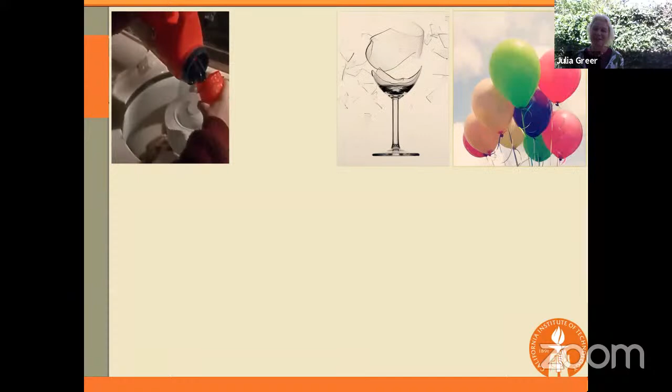All right, so you've been staring at this title for some time now, Materials by Design, so that probably makes a lot of sense. But when you look at the second part of the title, three-dimensional nano-architected metamaterials, you might be wondering why do all these words belong in the same sentence. The reason for that is because I'm sure many of you are familiar with a situation like this: you go to the store and you buy all these things that you absolutely need, and the bags that you are using to hold all these materials just are not strong enough. So of course this is not the only problem, right.

From the wine glass that shatters all too early for the toast, to the balloons that pop too easily, to the 'I really meant to have four children' situation—of course these are all examples of materials that are lightweight, and because they're lightweight they're weak and easy to damage and tear. Now in contrast, the materials that we know to be strong, that we know to trust—for example, if I weren't giving this seminar virtually I would have probably taken one of these to come see you. The weight of a Boeing 747 is roughly 1 million pounds.

So if you do a very quick calculation, if I were to fly to Istanbul to see all of you at 5 gallons per mile at $2 a gallon, my ticket would have cost about $73,000, right? So I'm glad that you would have probably reimbursed me. Thank you for that.

Of course, this is an example of a material that is strong and also expensive. The Dreamliner already reduced its weight by about half, and so uses 20% less fuel.

Now, speaking of materials that are too heavy, whatever happened to the space elevator? Do you remember how maybe a decade or so ago, we kept on bringing up this concept of a space elevator? Well, as far as I know, there still isn't one.

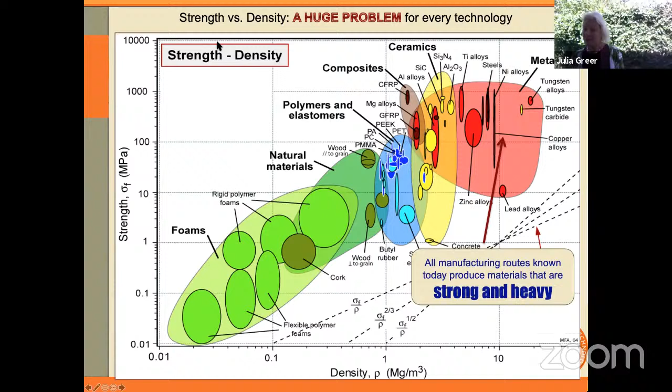And the reason for that is because of this very busy plot. If we plot strength as a function of density in this kind of log-log parameter space, what we see is these colorful domains, representing all the materials that we know how to make today. Here I chose to plot strength, but it could be any other mechanical attribute, like toughness or stiffness. The picture that emerges right away is that we are very good as a society at making materials that are simultaneously strong and heavy, or light and weak.

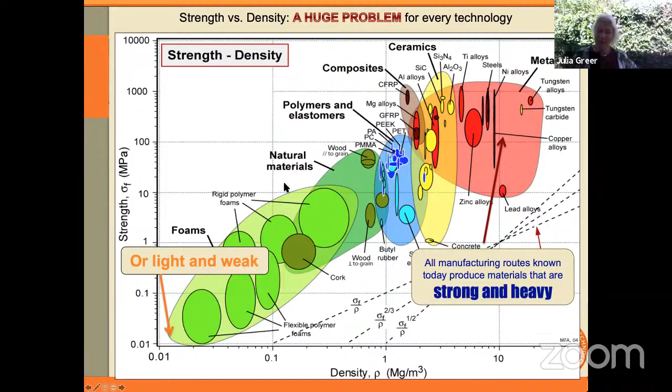What we're not so good at is making materials that are simultaneously lightweight and very mechanically resilient. All of these colorful domains represent the material classes that we know how to make today. So how do we get to the so-called white space, or target region, if everything we know how to make today is already plotted here?

The way we do it in our group is by introducing a concept of architecture in material design. For example, if you look at the Great Pyramid of Giza, this is the largest man-made stone monument. Of course, it's very strong. It stands 150 meters tall and weighs nearly 6 million tons, so it's very heavy.

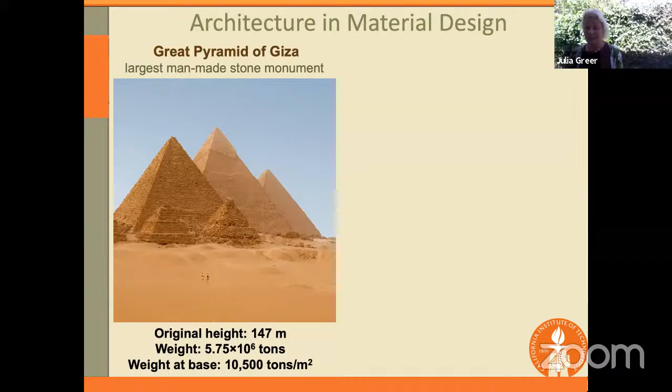Now, in contrast, the Eiffel Tower stands twice as tall, over 300 meters, but weighs three orders of magnitude less. So what that tells us is that with proper architecting of your materials, you're able to attain the same mechanical resilience without using quite so much material.

So we began this research with making micro lattices. What you're looking at is an entirely nickel-made micro lattice sitting on top of a dandelion, and you can see it's hardly perturbing it at all. Since when can we put a chunk of metal on a dandelion? These materials are very, very lightweight.

But to get to the simultaneous attainment of lightweight and strength, we need to go down 3 more orders of magnitude in dimensions. All of the examples you're seeing on my screen right now are called nano lattices or nano-architected materials, all of which were made in our group.

There's an obvious level of porosity here, as you can see, they're very open. They're called cellular solids, and because of that, they contain about 99.9% air, since these are very open architectures. Now, the less obvious level of porosity, of course, is this.

Many of these architectures are comprised of an interwoven network of hollow tubes, and the tubes are hollow on the inside. So the largest dimension of the solid at any location is just the wall thickness of each of these tubes, which can be on the order of 5 or 10 nanometers. You can imagine that this single material embodies every length scale, from 5 nanometers or so, to hundreds of nanometers, to microns, and eventually millimeters and centimeters.

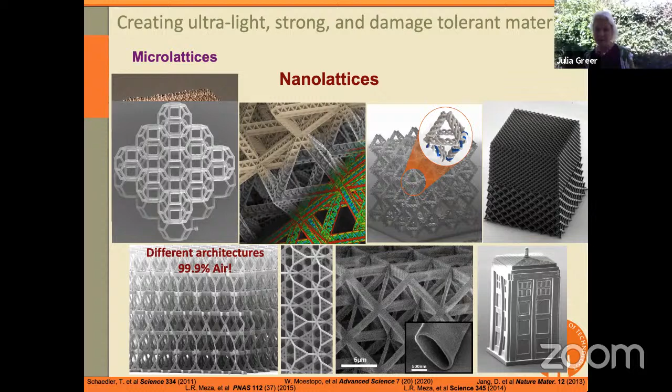And because of that, it is appropriate to call these materials metamaterials, because their properties can no longer be described only from the perspective of material science, or only from the structural perspective.

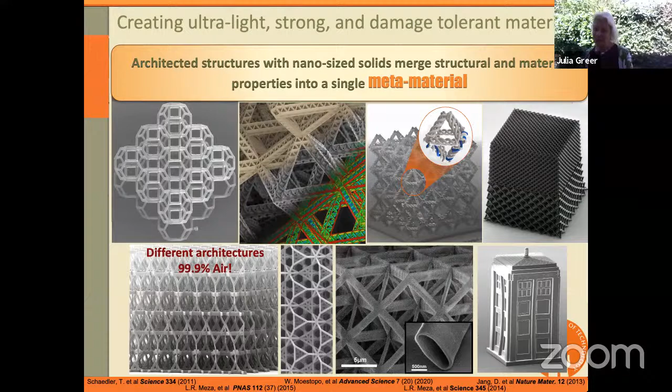At these length scales, at the nanoscale, these properties are no longer independent of one another. Now, I demonstrated to you that these are very lightweight, but I have yet to show you why they're high strength. Here's an example of a so-called size effect.

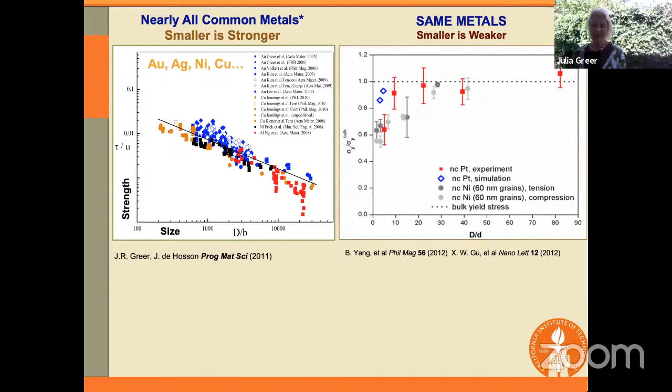Now, if you take exactly the same metals and change their atomic microstructure such that they now contain grains and grain boundaries, all of a sudden this effect is reversed and smaller is now weaker. Same gold, same nickel, same platinum—this is a more modest size effect because it's not plotted in log-log space. But nevertheless, it shows that when you reduce the dimensions of nanocrystalline materials, even though they're chemically the same, their strength becomes lower.

Now, the size effect manifests itself in other properties. For example, glass is known to be very shatterable, but at the nanoscale, if you look at the tension of this single glass nanorod whose dimension is 150 nanometers, watch this region where you can clearly see it forming a neck. Of course, this behavior is much more typical of metals as opposed to glasses. This glass thinks that it's a metal, and you can see it's deformed over 100% before failure, which is very unusual for glass.

Here's the last example of the size effect: we are deforming a single unit cell of one of these nanolattices, made out of a very brittle material, titanium nitride. You can see the beams bending and deflecting, and if you measured the tensile stress, it would exceed 1.7 gigapascals. Something that brittle, tensed at 1.7 GPa, should certainly not stay intact—it should be fracturing. But these beams are able to deflect not only once, but over multiple cycles without any evidence of failure.

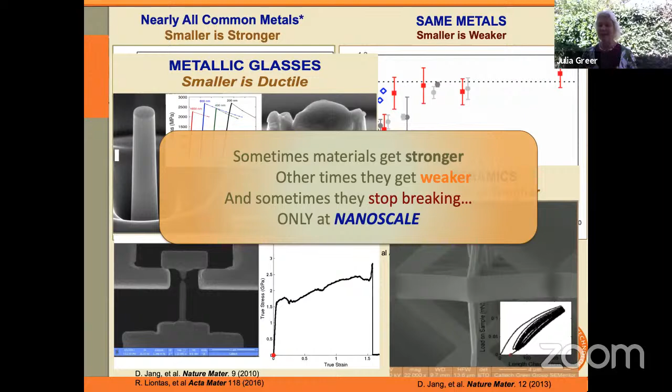So the takeaway message is this: sometimes materials get stronger, other times they get weaker, and it is possible to suppress brittle failure. But all of these effects emerge only at the nanoscale. So the big question in our group was, how can we harness this beneficial size effect and proliferate it onto a larger scale? This is where the concept of architecture comes into play.

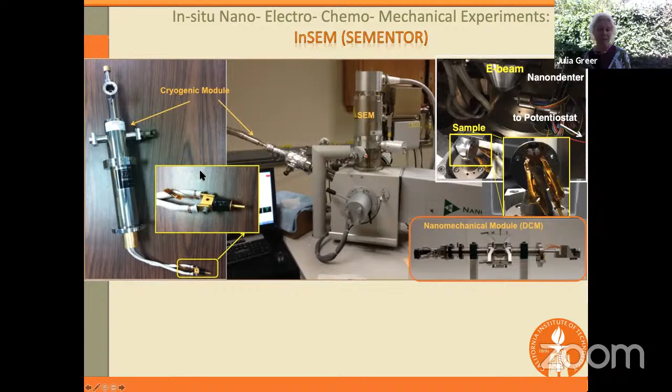To do our experiments, since all these materials are quite small, we have to utilize a special instrument. If you look at this center part, it's an SEM chamber—scanning electron microscope—equipped with a variety of other capabilities. Here's a nanomechanical module for mechanical experiments, an electrochemical module for experiments like batteries and energy storage, and a cryogenic module for experiments at much lower temperatures. These are the different acquisition devices that we use.

Now that I've shown the kinds of samples we work with, I'd like to walk you through the steps of our hypothesis. The question was: can we somehow harness the beneficial effects of the nanoscale and proliferate them onto a larger scale?

So what I'm about to show you is a nano architecture. This specific one is called an octet architecture. It's made out entirely of hollow tubes with alumina, which is a very brittle material. The wall thickness is on the order of 50 nanometers and the tubes are all hollow, so it's effectively your coffee mug with a severe case of osteoporosis. It's very porous and very brittle.

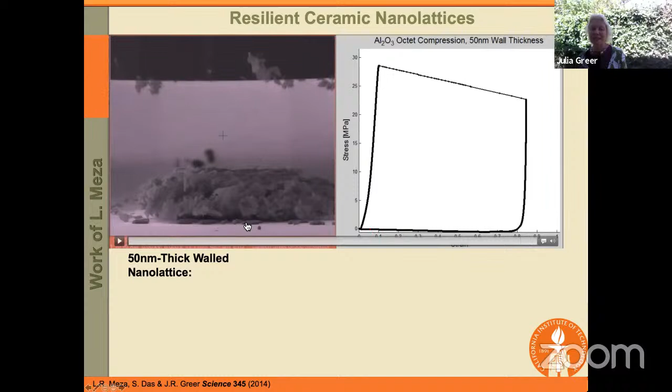Now let's see what happens when we compress it. As we compress it, of course, it's going to shatter and fail brittly. This is not something people are surprised by. You can see this failure right away, it doesn't even try to recover. You can see we have a little nano cemetery in our instrument, and nothing surprising basically happened.

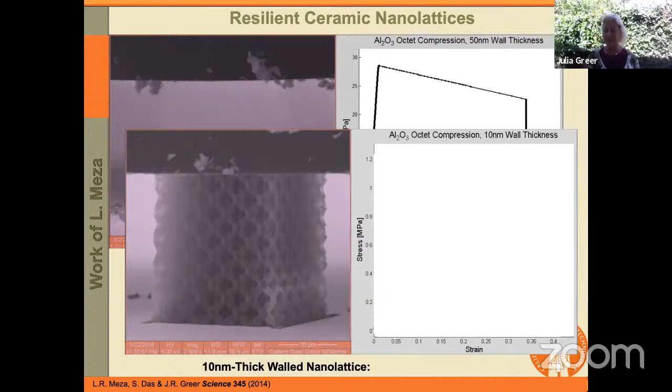Now let's repeat this experiment, but change one parameter: the wall thickness. We'll deposit this material in exactly the same way, using exactly the same architecture, so it's still an octet. The only thing we'll do is reduce the wall thickness by a factor of 5. So instead of 50 nanometers, they're now 10 nanometers, just as brittle, and in fact it should shatter even more easily. Let's see what happens as we compress this very brittle alumina material.

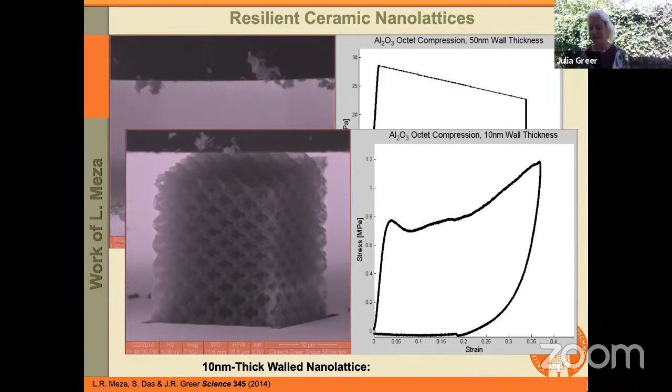You can see it compressing, compressing, compressing, and then just as we're expecting it to fail, you can see what happens. This particular material thinks of itself as a sponge. So you can see very clearly exactly the same experiment, exactly the same architecture, but two very different responses, all as a result of the wall thickness reduction. If that doesn't convince you there is in fact a size effect, then I should just stop this topic right now. Of course, this fully recovers.

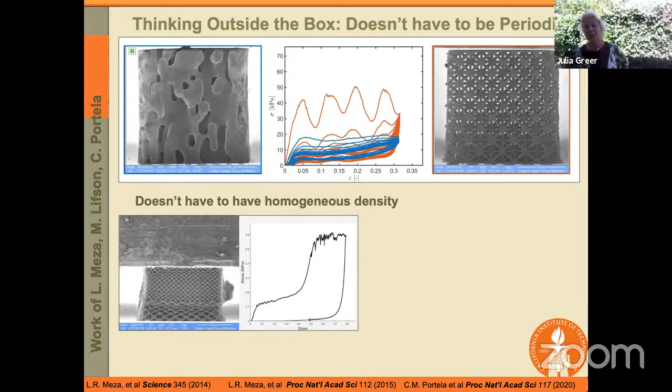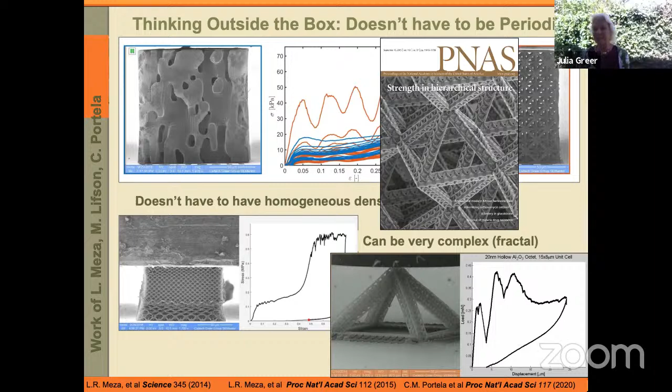Now, these architectures can be complex in the sense that they can be fractal, so that each individual beam is comprised of these cells. You can see already that each of these legs is starting to kink, and just as we're expecting it to fail right at those kink locations, because they're clearly very brittle, you can see the architecture fully recover. So what that's teaching us is that the size effect is very powerful and can indeed be proliferated onto larger scales by this concept of architecture.

Now, one common feature of all the architectures I've shown you up to this point was the presence of so-called nodes, junctions where the beams meet. To avoid the nodes, what we've designed is a woven architecture. What you can see here is effectively a rope, comprised of various strands like a braid or a spiral. At the nodes, we no longer have any of these junctions. Look at what's happening: we're able to push on a rope effectively. We can tense it first and then compress it, and you can see it offers resistance in both directions.

So it's effectively a rope that is both compressible and extendable simultaneously, and that hasn't really been demonstrated before. What you can see here is how much more strain these types of woven architectures are able to attain.

Now the question is, why does it happen that these hollow architectures, made entirely of brittle material, are able to recover? Well, the answer actually lies in mechanics. If you look at failure mechanisms in beams, these hollow beams experience a local instability called shell buckling, which is effectively what your soda can would do if you were to step on it.

It turns out there's a critical ratio of wall thickness over the diameter of the beam. If you make a simple model of this beam, the wall thickness is T and the radius is A, you can set the failure criterion: local buckling would occur at a critical figure of merit of this T over A ratio, while yielding would certainly be failure since it's a brittle material. Setting them equal to one another, for this particular material, alumina, we can come up with the critical fraction: T over A critical for this material is about 0.03.

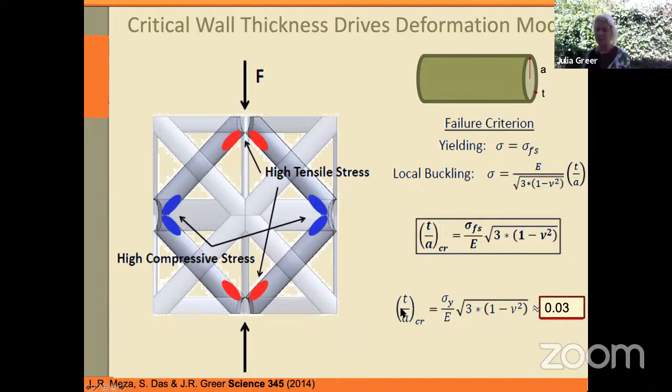Let's see what happens here. For the 10 nanometer wall thickness, this critical ratio of T over A is below 0.03, and for each unit cell size, for each type of sample, it fully recovers. You can see that from the data, going all the way back to zero strain. This image after deformation - you would never be able to tell it's taken after deformation because it looks exactly the same.

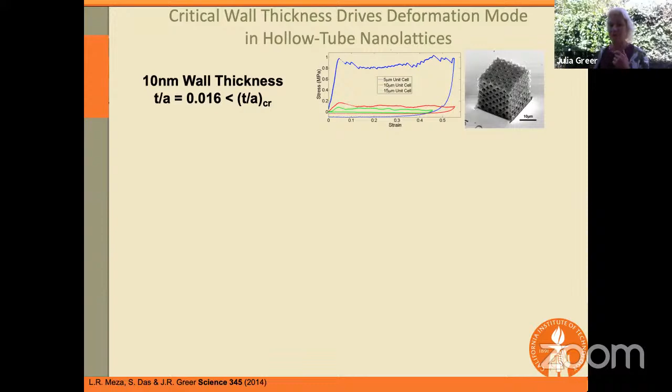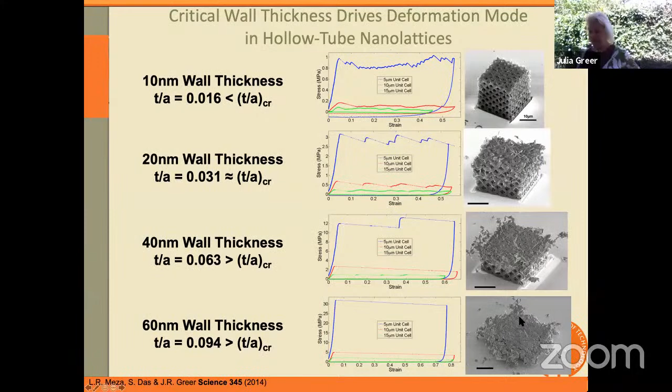As we increase the wall thickness and get first to the critical thickness and then exceed it, the deformation becomes a lot more jerky, more catastrophic, and the material is not able to recover after that. So what that tells us is that the answer must lie in mechanics.

Let's see how close we got to this theoretical maximum and whether we got into this white space. The plot I showed earlier of strength versus density - these oblong regions are the data we had taken through the years. What you can see is that we already, for example by creating hierarchical nanolattices, reduced the relative density of these architectures by two orders of magnitude.

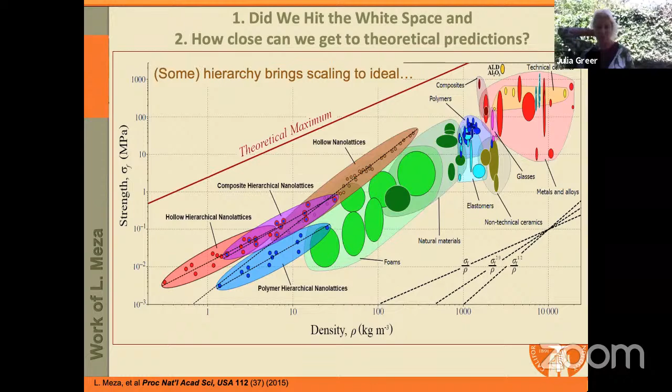And we certainly have ventured into the white space. This was at the time when we started doing this work, and we - and perhaps many other groups - can now do a lot better in getting closer to the theoretical maximum.

So now the question is this: if it's all about the critical wall thickness to diameter ratio, just like we showed for the recoverability, that means if we were to build a building where each beam had a thickness of 10 centimeters and a radius of 3 meters, and then we constructed a giant building like this...

Maybe you guys have something like that in Turkey - and a big giant came and stepped on it, it should just spring right back, just like our architectures do, right? Hopefully you're all smiling, because of course that would never happen - a building would never recover like this.

So why not? The mechanics tells us that as long as T over A is below this critical ratio of 0.03, we should be able to observe this recoverability, but we don't observe it at large scale, of course. So how does the size effect manifest itself here?

It turns out that the answer is all in defects. Of course, brittle materials all fail at flaws. Before any of the beam members in a building has a chance to recover, the material will locally fail at one of these flaws, because the probability of finding a flaw, or multiple flaws of certain sizes, in something that's 10 centimeters thick is 100%.

So when we globally apply some kind of compression, the local stresses ahead of these flaws will always exceed the globally applied stress, and certainly the material will shatter and break before any kind of structural instability takes place, like shell buckling.

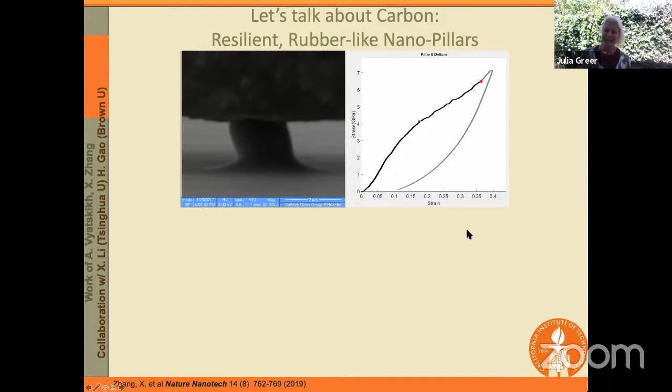Now, you all know what happens if you push really hard on your pencil lead. Of course, it's not compressible, and it starts shattering. Look what's happening with this pillar: it's now at a stress of 5 gigapascals, a very, very high stress. You can see that as we're compressing it, it's really not enjoying itself. It's bending out of plane, and then it fully recovers. So this very brittle, very strong carbon material thinks of itself as rubber. How can that be?

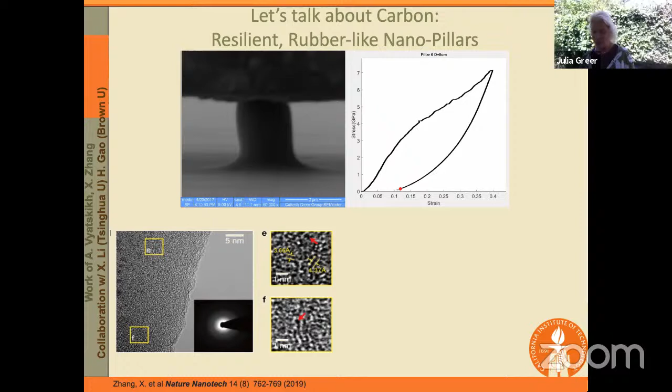That is very, very unusual, right? What we discovered is when you look very carefully at the microstructure of this glassy carbon, you see these curved strands. Even though the structure is amorphous or glassy, there are small regions of graphene-like ribbons, separated by a very small distance of about 3 angstroms. These segments of graphene, effectively sp2 hybridized carbon, are what allow these regions to shear with respect to one another without undergoing global failure. We collaborated with a group at Tsinghua University who performed molecular dynamic simulations, and what you can see here is the representation of the microstructure we uncovered experimentally, done through atomistic simulations. These are the curved regions of sp2 hybridized carbon.

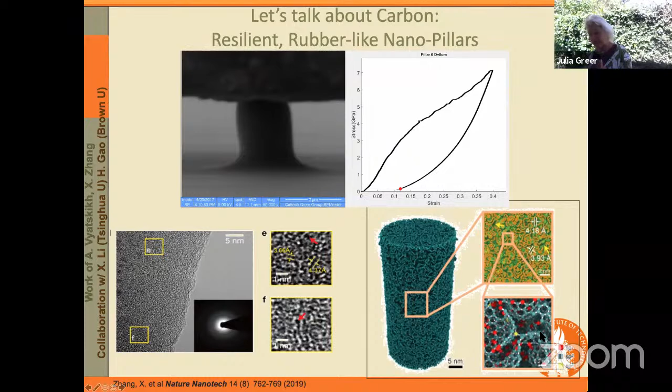Now, it turns out that in compression and tension, this behavior is prevalent, in the sense that you can extend it up to 20% tensile strain. That is unprecedented in carbon, right? So it turns out the answer really does lie in the presence of these regions. These very small regions with curved graphene segments are able to undergo localized shear transformations such that they can collectively accommodate the application of the global strain. You can see in the simulations, for example, at a very high strain of 60%, they're extending quite substantially prior to failure.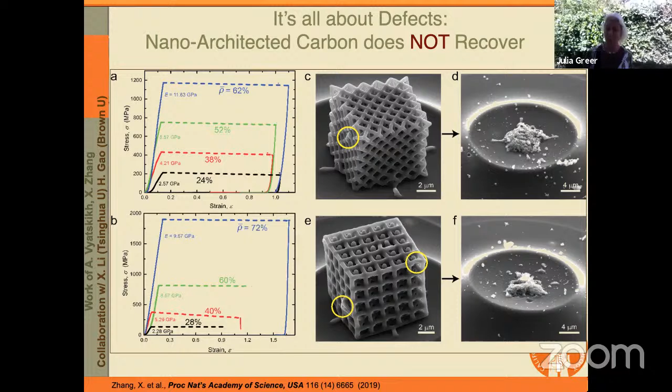So that's the explanation. Now that we know these nanoscale building blocks are able to behave like rubber, why don't we make architectures out of them? Because then they should also spring like rubber. What we learned is that in the case of carbon, non-hollow tubes, we always destroy the nanolattices. Even though the behavior of each individual building block is recoverable, when you start constructing a nano-architected material out of it, it shatters every single time and fails brittly. The reason for that is, of course, the presence of the defects and the presence of these junctions. So this is what I'd like to highlight here: the importance of defects and their role in the deformation of the material.

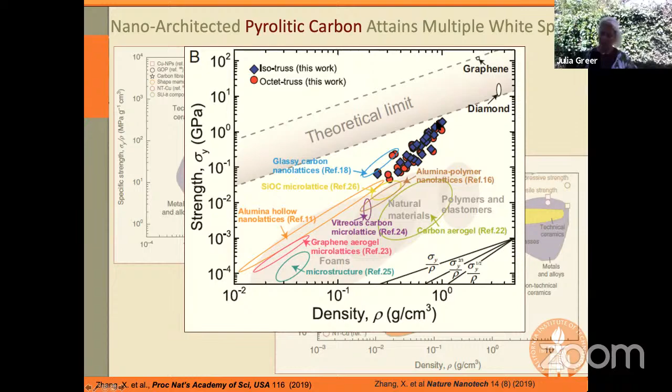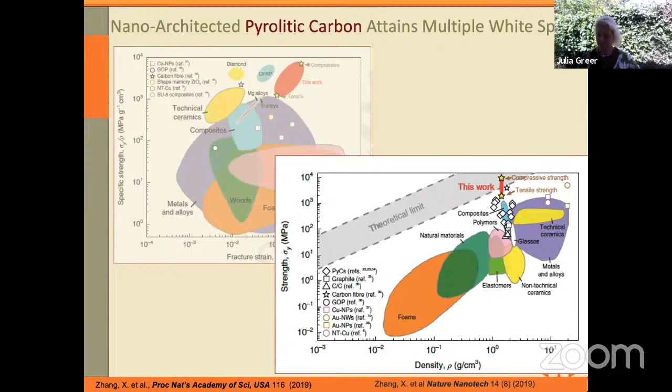Now, the good thing about carbon - and I'll skip right to here - is that when you plot this strength versus density white space I keep referring back to, it turns out that in the limit of higher density, we're able to approach the theoretical limit much better than we were able to do with the hollow alumina nanolattices. Here's where the nanolattices are, and you can see that in the case of carbon, we're much more able to get to the theoretical limit. Here, if you look at strength versus density - tension and compression - compared to other carbon-based materials, there's definitely promise here.

Okay, so let's switch gears a little bit and look at the same micro and nano architected carbon. Instead of quasi-statically deforming it fully, like I've been showing you up to this point, let's impact it at maybe hypersonic velocity. For that, we collaborated with a lab at MIT who developed a technique called Laser-Induced Particle Impact Test, or LIPIT. The idea is that you have a laser pulse during which you accelerate particles on the order of 10 to 40 microns in diameter, and you're able to document and image it as this is happening.

So here are some of these carbon nanolattices. You can see that these are actually quite large compared to what we usually do. Here's a scale bar of 20 microns, so this thing is about 100 microns.

And now we're going to shoot one of these projectiles at it, and let's see what happens. So here's a movie that shows one of these projectiles as it hits. It's effectively a small bullet, right?

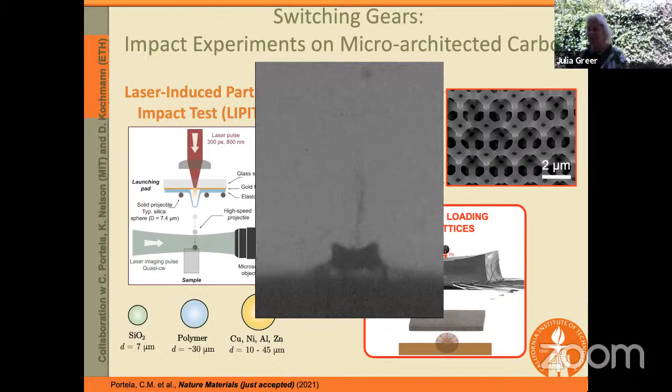As it hits this material, what we are discovering is that there are three different regimes. Sometimes the response is entirely elastic, so it just rebounds. The second type of response is projectile capture. And then the third type is projectile rebound, where the projectile hits the nanolattice, but it's not elastic—there's an impression left, and then it rebounds.

So it looks like there is a certain degree of impact resistance that these materials offer, which is very exciting for us. So we can plot the rebound energy as a function of impact energy.

Of course, the one-to-one line is what you would have for the ideal impact mitigation. If you compare our materials at a relative density of about 14%, you can see this is the inelastic energy, this is the absorption energy, and this is the rebound energy. So we come pretty close to that.

Now, this is for the relative density of 14%, so these are very, very porous. As soon as we increase the density to about 23%, about one-fifth, they're still not very dense.

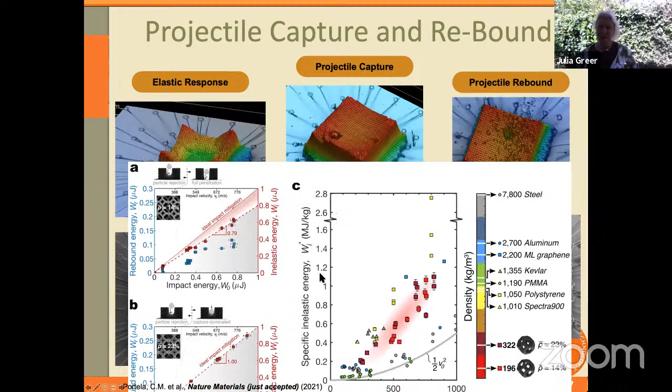You can see that we get very close to the ideal impact mitigation in the sense that all the impacts are absorbed. And when we plot the specific inelastic energy, normalized by density or weight, you can see that our materials actually outperform Kevlar and many other materials that exist today, especially at impact velocities approaching 1 kilometer per second. So we're very encouraged by these results, and we're hoping that they may offer some impact resistance and shielding.

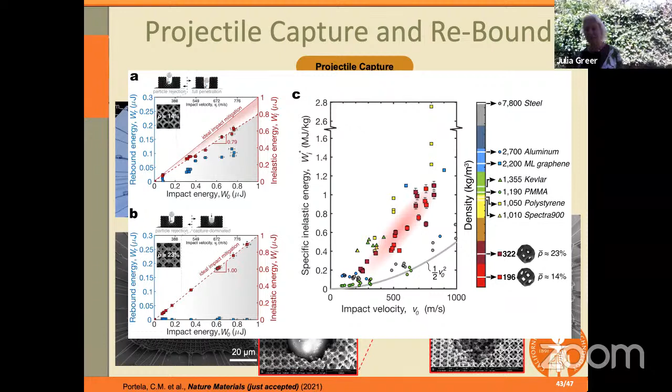Okay, so I've been talking for some time now, and I'd like to maybe take a little break—all of you take a little stretch, stretch out, and take a breath.

Let's find out what this 'by design' concept is that I keep bringing up. Up to this point, I've shown you a variety of different architectures that are exceptionally lightweight, and that you can deform in a variety of different ways, exhibiting mechanical resilience and recoverability even under complex stress states. But how is that by design?

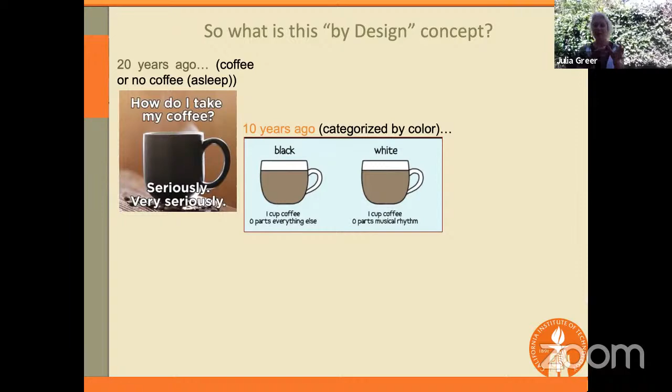The analogy I'd like to draw here is with coffee. Of course, all of us enjoy this beverage. Twenty years ago, the coffee situation was: how do I take my coffee? Seriously, very seriously—people would just either drink coffee or not. Ten years ago, we became a little more advanced, and you could have coffee either black or white—with milk or by itself. Only two choices. And of course, in Turkey, you people are the coffee experts. Now if you go to Starbucks or any coffee shop, you have half-caff, half-decaf, double latte, skinny cappuccino with cinnamon, etc. The number of choices just in the world of coffee has exploded, and now we have the freedom to design our own coffee.

And that is exactly what happened with the materials world. As we've been working with these architectures, we found ourselves exploring different chemistries and resins that we put together when we manufacture these materials. Instead of buying commercial resins, we can start synthesizing them ourselves.

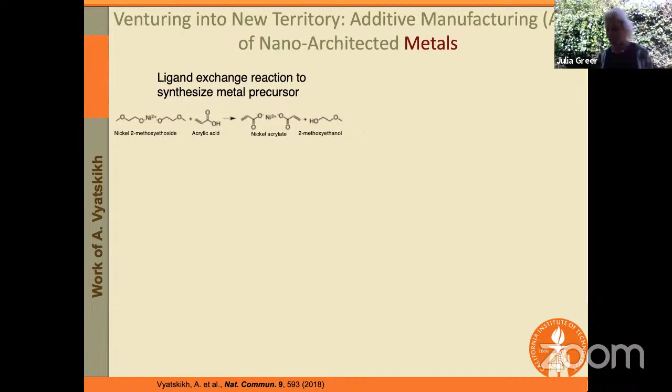This is the work of my former student a couple of years ago. You can see that this nickel ion is now captured inside of an organic outer shell—the nickel ion is at the core, and you have this organic shell. When you undergo this acrylate-based reaction, where you effectively cross-link this polymer in response to the laser light, what you end up with is an architecture that contains nickel.

Now, as we're looking at this architecture, the unit cell size here is about 10 microns, and each beam might be about 2 microns in diameter. This particular resin contains both the nickel and the organic material.

So how do we get rid of the organic material? Because ultimately what we want is the nickel. Well, one way to do it is by burning it. Through this process called pyrolysis, we can burn off the organics and end up with an entirely nickel microstructure.

Now watch specifically the size of the unit cell here. It keeps shrinking, about 2 microns. So it shrunk from about 10 microns and 2 micron diameter to about 2 micron unit cell and 400 nanometer diameter. When you look at each individual beam, you might think these are very porous—they don't look so nice.

Also the question is, how nickel is this nickel? Is this really fully made out of nickel? So we did quite a bit of chemical characterization, and you can see that mostly it is indeed nickel.

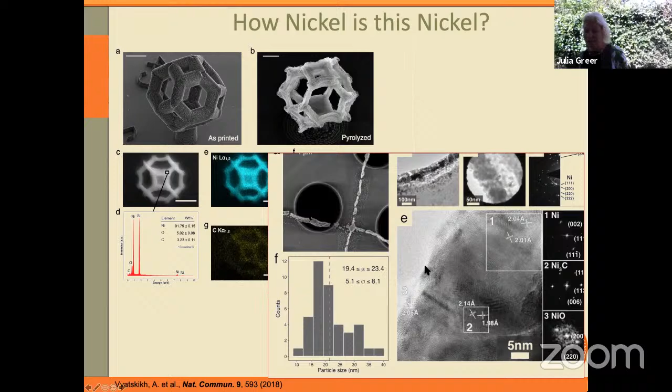We did some microstructural characterization using the TEM, the transmission electron microscope. You can see the grain size here is on the order of 20 nanometers, so it's very nanocrystalline, mostly nickel with some nickel carbide and just a little bit of nickel oxide.

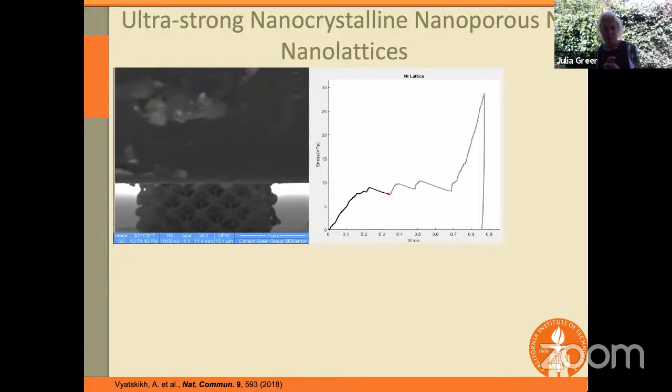So now let's look at the mechanical behavior of this material. I'd like to point out again, it's nanocrystalline, it's nanoporous, and it's not exactly pure. So according to any metallurgist, this is a terrible, low quality material. It has impurities, it has pores, so it should be relatively weak—it shouldn't have a good strength, right?

Now, as we're compressing this material, you can see that it behaves just like any cellular solid would, but it doesn't recover—again, something that we would expect for a metal.

But here's something interesting. When we compare the specific strength—meaning the strength normalized by density—of a bunch of typical metals, like titanium, aluminum, silver, and some other alloys, across a variety of commercially available additive manufacturing methods, what we can see is how quickly the strength deteriorates as a function of the feature size.

For example, most commercial techniques are able to produce 1 millimeter features very well, and you can see the strength is very high. But as you reduce it from 1 millimeter to 100 microns, just simply a factor of 10, you can see that your specific strength falls by 2 orders of magnitude.

So what that tells us is that at our sizes, if we were to just extrapolate this plot, we should be somewhere down here. But when we plot the nickel—the so-called low quality nickel of our work—and compare its specific strength to that of other available processes, what we can see is that its strength is comparable to something that's about 500 microns in dimensions. So what we're learning is that we don't sacrifice the strength; we don't have this rapid decrease. Effectively at the nanoscale, materials become much more robust against defects. This is a very promising result.

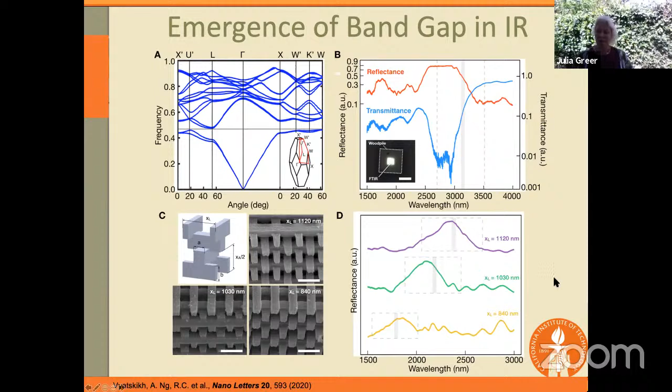Now, this whole acrylate-based chemistry that I showed you works very well, but it's a bit toxic—so the acrylic chemistry is not exactly very good for the environment.

So we have been exploring other ways of creating the same or maybe different kinds of metals and oxides. What my students came up with is a hydrogel-based synthesis. You take a hydrogel, and this is all aqueous environment, so it's effectively water. And what you can do is leach in and swell in various metal salts.

In this case, it's zinc NO3 into this polyethylene glycol hydrogel. Once you've swollen in these metal ions, we subject it to heat, and through a process of calcination, we get rid of the organics again. What we end up with is zinc oxide, a functional oxide unit cell made entirely using water, effectively. Yet again, it's a very nanocrystalline architecture.

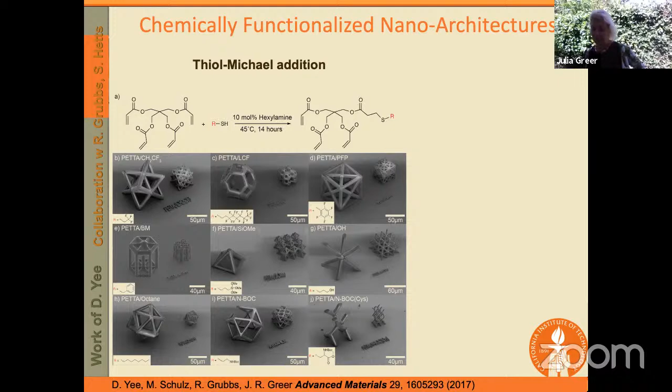For example, DNA. We were able to attach some DNA to these architectures into a membrane, which can then bind to a variety of different chemotherapy drugs. In this particular case, it's doxorubicin that binds to the architecture and is able to function in blood and, for example, wick away excess medication for a chemotherapy patient.

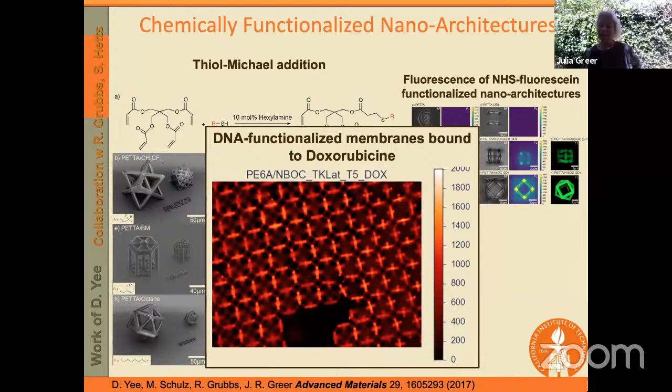I'd like to finish by going a little bit into energy storage. Many people these days are working on lithium-ion batteries. Using this kind of hydrogel-based approach that I just showed you, we set out to make a complex oxide, lithium cobalt oxide. It's a typical material for cathode chemistry in a variety of different batteries. So what we fabricated is a carbon-based anode and an LCO, or lithium cobalt oxide based cathode.

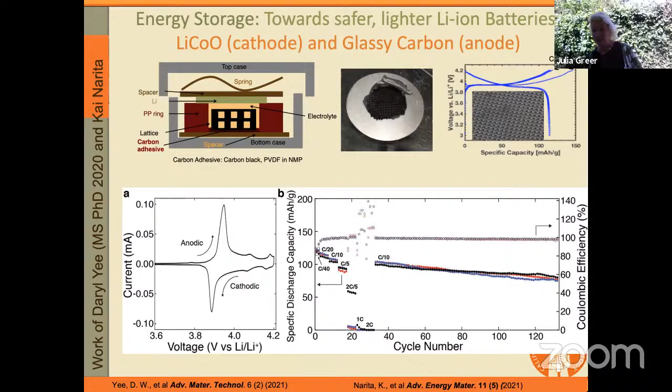And so here's the discharge capacity. You can see we can cycle it over many, many different cycles. And what we learned is that these two actually combine very well together. So ideally we would eventually make this interdigitated battery.

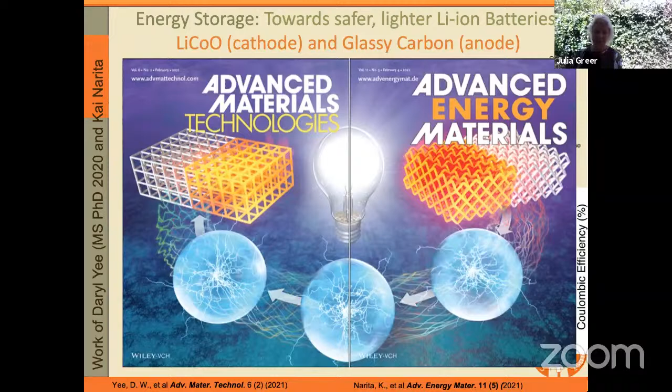Apparently this work was so captivating that both journals decided to feature it on their covers. You can see how this architected approach to battery design can pave a pathway towards an all solid state battery, where for example we won't be susceptible to all of these challenges with the electrolyte being unstable, and of course the safety of the battery.

Okay, so this is the last part. Since we're on the topic of electrochemistry, we have explored this concept of electrochemically reconfigurable materials. If you look at a tetragonal architecture, much like the architectures I've been showing up to this point, as the active anode material, you effectively deposit a very thin layer of silicon, about 100 nanometers.

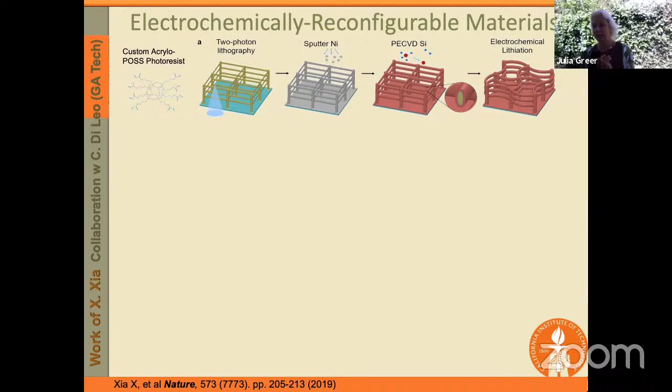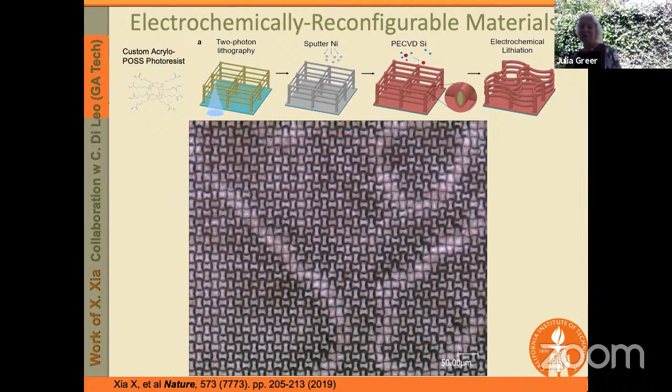Now when that happens, looking at the top-down view, as we lithiate it, so this is the lithium going into this anode, what you see is that it creates this pattern. Some people might think this is a sinusoidal pattern. I call it, to me, they look like violins. I'm a musician, so to me it looks like a very musical pattern.

And so here's the top view before and after the lithiation, as well as the tilted view. And you can start seeing these nodes, right? You can see that the beams around the node co-rotate to create this kind of a shape. Now I'm not showing this to impress you with a cool pattern. What I'm showing you is that it's truly a battery.

In fact, when you lithiate and delithiate, you can see that the pattern that's formed either buckles very closely together or unbuckles farther apart. You can see that when the cutoff voltage is on the order of 0.6, you get very good behavior of specific capacity, voltage versus specific capacity. You can see we're cycling them at different rates. So it is a battery. It's not a great battery, but it is a battery nevertheless.

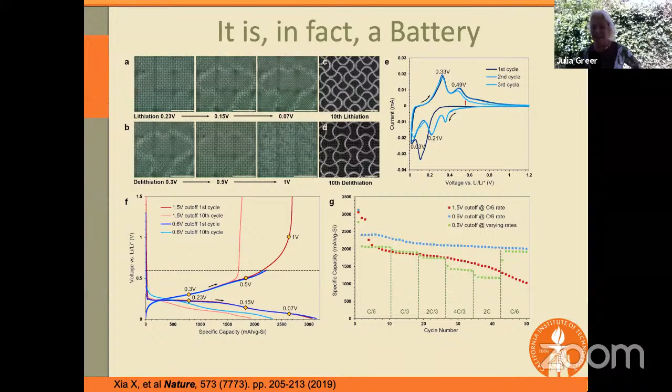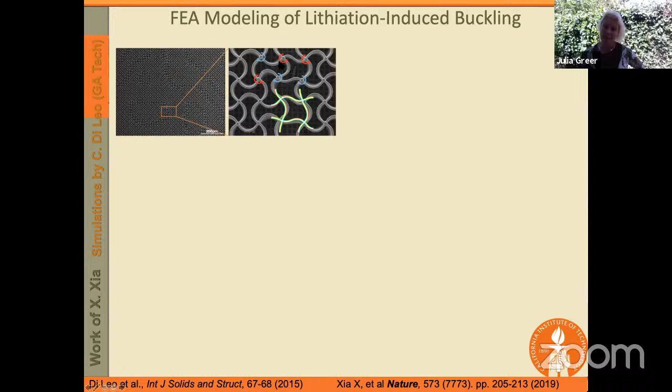But here's what's interesting about this battery: we discovered that in the process of charging and discharging it at different rates, sometimes the nodes all co-rotate, and this is when you get this very nice architecture. Sometimes some co-rotate and some counter-rotate. When they co-rotate, you create this very nice buckling pattern, but when they counter-rotate, you create the second mode of buckling, and this leads to a very frustrated architecture.

And I would like to point out, this is not elastic buckling. This is actually yielding. The material is yielding as the lithiation is occurring, and the lithiation front is progressing through the beams from the outer surface towards the inner part.

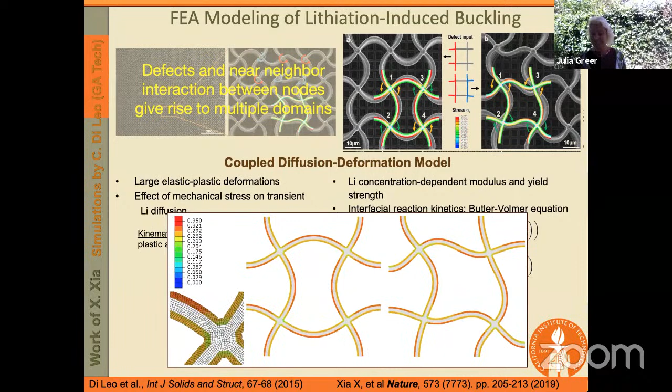So we collaborated with a research group at Georgia Tech that created these patterns as a function of lithiation. You can see the color changing, that's the amount of lithium going in, and of course it's changing the composition of the sample. What we uncovered is that these domain boundaries of the frustrated buckling patterns seem to correlate with the lithiation rate. When you lithiate very slowly, at C/20, it's very slow and forms one large domain. When you lithiate very fast, it forms much smaller domains, and more of them.

So effectively, to us, it looks like a model treatment for the so-called Ising model, where you have ferromagnetic and anti-ferromagnetic switching behavior. Once you incorporate a coupling coefficient and recognize there's a correlation between the rate parameter, which in our case is the lithiation rate, and in the case of the Monte Carlo simulations is this KT parameter, the thermal contribution, we see very similar behavior.

These images at the top are actual renditions of our SEM images, and the images on the bottom are computations. What we were able to show is that there's a band diagram you can create as a function of lithiation. When you start off with pure silicon, there are no band gaps; of course, every state is occupied.

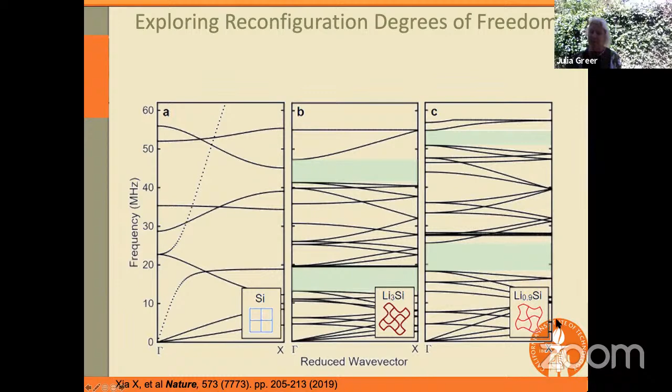Once you start lithiating it, a band gap emerges. As you lithiate or delithiate it further, which corresponds to a more relaxed pattern, you can see these band gaps shift. That allows us to attain a variety of different deformations, for example out-of-plane buckling, rotation, or other degrees of freedom. And that tells us we can actually utilize these defects to our advantage.

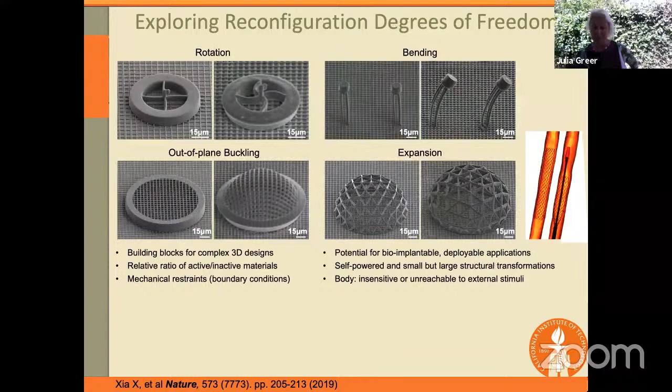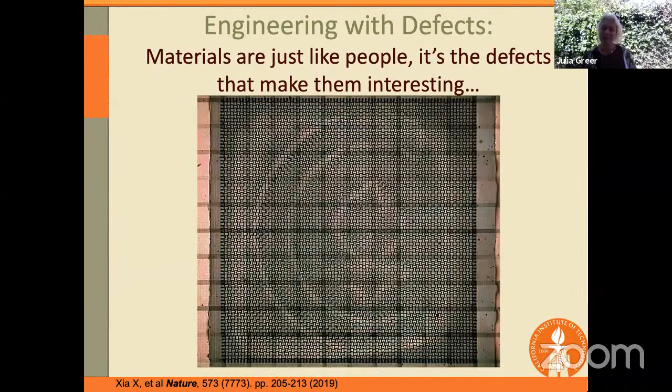What I'm about to show you is this: we pre-programmed a defect in here that you don't know about. You're looking at the top view of this battery, and we're about to lithiate it. As we're lithiating it, you're going to see a pattern start to emerge. Hopefully you can see right away the resemblance between the pattern forming in the video and the little logo I'm showing you on the right. So what that tells us is that once we understand the behavior of the defect, we can use this to tailor in a specific design.

Okay, so this brings me to the end of my talk. I guess the question here is, so what? You showed us a variety of different architectures, some pretty pictures, but what does all this mean? I'd like to leave you with the following message.

If you're clever about three very important aspects of material creation—one of them is the specific architecture you're using to develop your new material. Does it need to be periodic? Does it not need to be periodic? What kind of underlying constituent solid are you using, and what functionality are you hoping to elicit? That plays a tremendous role in governing how your material will behave, and especially affects its density and weight.

The second part is the nano size effect. How does your specific material respond to the nanometer length scale? Does it become less brittle? Does it become stronger or weaker, or maybe it's not affected at all? It's very important to understand the various aspects of the size effect when you develop new materials.

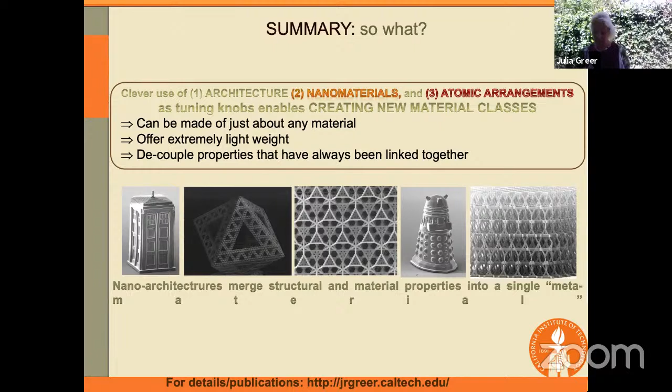And then, of course, the third aspect is the atomic level microstructure. Is your material crystalline or amorphous? Is it single crystalline or nanocrystalline? Those are all very important aspects. So if you're clever about these three specific tuning knobs, so to speak, you can create entirely new material classes.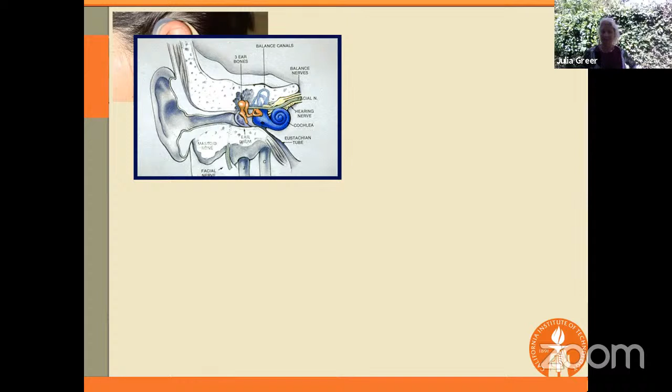And the reason why you would want to do that is so that we can start living in a world where, instead of hearing aids, you can just write the cochlear bone directly in your ear, so you would never need to wear these bulky hearing devices. Your iPhone 83 would hold its charge for 83 years without needing to be recharged.

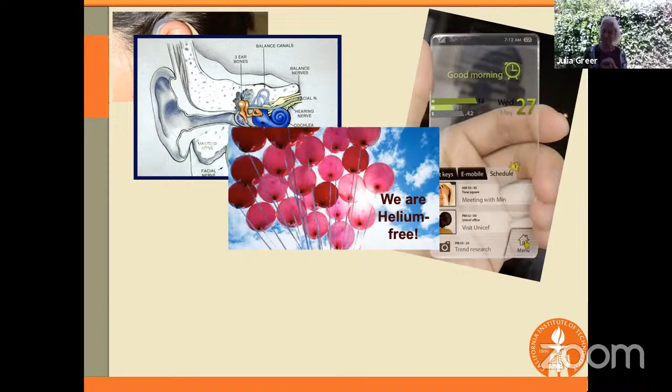Of course, we're going to be able to build much more reliable and much more capable batteries. Balloons will no longer need to use helium, which is actually a precious resource, because vacuum is lighter than air. So as long as these materials can be made very stiff and non-porous, we would be able to simply evacuate instead of using helium.

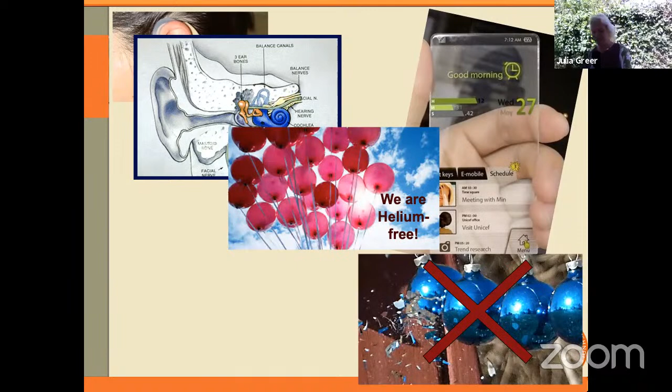Here, of course, these are Christmas ornaments, not very relevant for the season, but the idea is that we can prevent them from shattering using these architected materials, so you wouldn't break them or injure yourselves anymore. This is probably my last example—it's getting late for you, so maybe you'd enjoy a little dessert afterwards. What I'm showing you here is some chocolates. Our latest pursuit is chocolate nanolattices, which are 100% taste, 99.9% air, and 0.01% calories.

And with that, I'd like to thank you for listening.

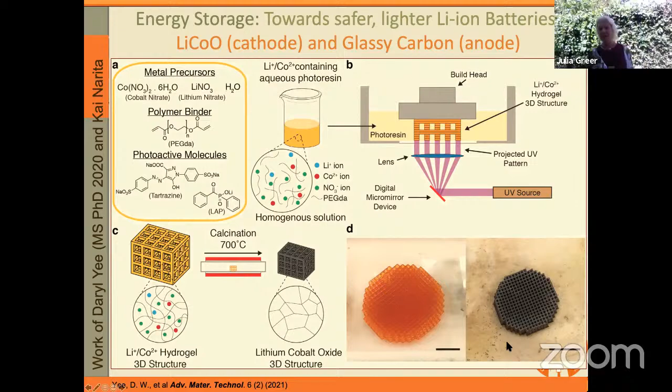So I showed you some applications in nanophotonics, some applications in creating metals, and some examples in energy storage and biomedical applications, for example, creating stents. There are many technologies that require miniaturization of devices, for example in the biomedical industry, making a stent for your eye, or something very, very small.

This kind of additive manufacturing of shape memory polymers would allow you to create something intricate and biocompatible that can be inserted directly into your skin or into a very small vein. So we see tremendous potential in developing these additive manufacturing approaches for applications where miniaturization and shape integrity are important, as well as payload, such as sending anything up into space or into the air, where these can be made lightweight with the same functionality. That's how I would answer this question.

Thank you. We have received a question from Göre. Thank you for this great talk. How often do you use computational techniques in your research, and if you do, how useful do you think it is?

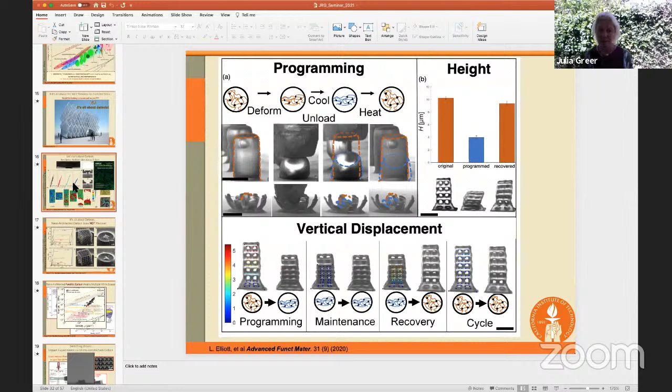We use a variety of computational techniques. I showed some molecular dynamics simulations earlier. For anything where we're trying to understand the nanometer-scale fundamental behavior of materials, we very often resort to molecular dynamics, so we do quite a bit of atomistic simulations.

At the larger scale, we do quite a bit of computation that is continuum-based. Let me see if I can show you. There are some continuum-based computations we've utilized in our work, which predict things like the influence of the nodes on the geometry, or like this, I think I showed here.

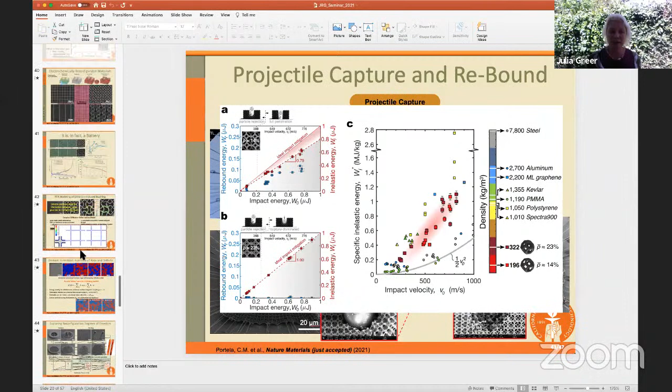Yeah, so here's a computational technique. This is all continuum-based, and this ranges from FEM type modeling to sophisticated models where we collaborate with other groups who develop theory, to Monte Carlo simulations. So we most certainly use quite a bit of computational tools, but we don't develop them ourselves—we either do it through collaboration or other means.

Sorry, did I answer the question? Yeah. Oh, okay.

Thank you. No problem. Another question: what is the most challenging part of this, materials design, manufacturing, testing, modeling, simulation, or other? What is the most challenging step?

It very much depends on the type of material and the functionality you are working with. It was very challenging to develop all of these additive manufacturing processes. For example, this hydrogel-based process was pretty hard to develop.

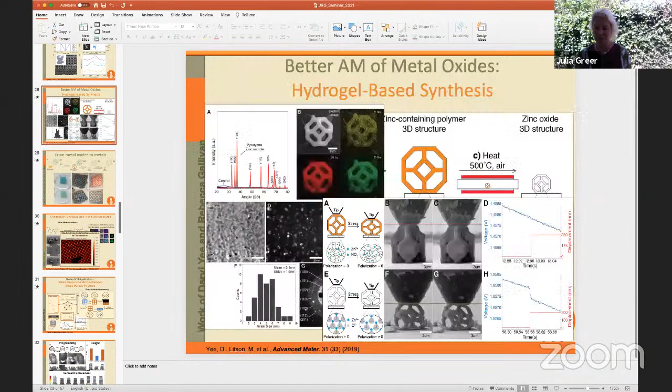We didn't know if developing the new resins was going to work—basically developing new aqueous photoresins while swelling them with different metal ions, we didn't know if the chemistry was actually going to work. And then we didn't know about the calcination process, if that was going to be possible. So creating these kinds of processes is always very challenging because we don't know what to expect.

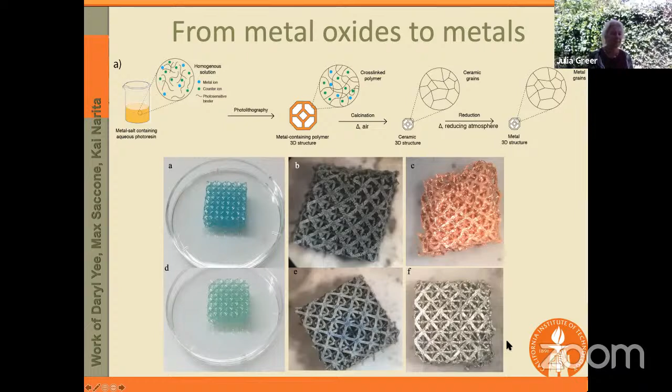So the processing step is very much challenging, and this shape memory response was very hard as well. I would say probably the synthesis to get to these 3D architectures is the most challenging step, just because it's such an unexplored parameter space that you never really know if it's going to work. Once you've made the architecture, testing it and manipulating it has proven to be much simpler than that initial synthesis step.

Thank you very much. Of course. Next question, please.

We have one question again. Thank you for this great presentation. Have you ever tried to manufacture lighter than air designs?

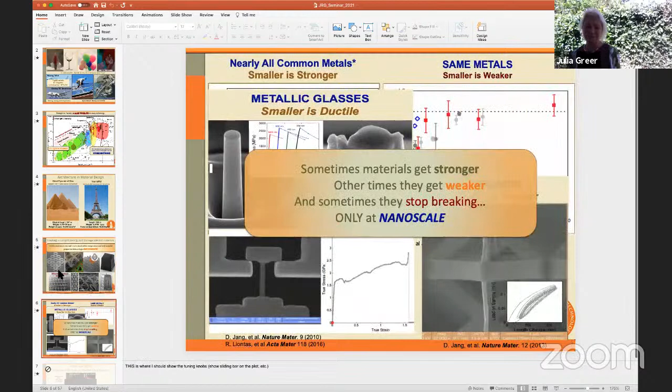Lighter than air, okay. I don't know about lighter than air, but these guys are all lighter than water. Actually some of these are 99.9% air. So I don't think it's possible to make lighter than air, but we've certainly gotten pretty close. A lot of these architectures you see here are pretty lightweight.

So do you use machine learning techniques in your studies? I know it's a really hot topic. We should, and I think the whole community is very interested in that. We haven't really incorporated them too much yet. There's still quite a bit of learning to do in the deterministic way, but we probably will at some point.

We're much more interested in the effect of defects. Of course, the defects would lend themselves to machine learning in the sense of how much each type of defect makes a difference. For example, in these kinds of architectures, if you take out one bar, it probably wouldn't affect the behavior of the material. Well, what if you take out 2 bars? What if you take out 3 bars or multiple bars? At what point does it start affecting the material behavior? And then can you incorporate that kind of defect tracking into the in situ process as you're making these architectures? That would be a big question.

So that's where the machine learning could probably really help. We haven't actively started yet, but we are thinking about it.

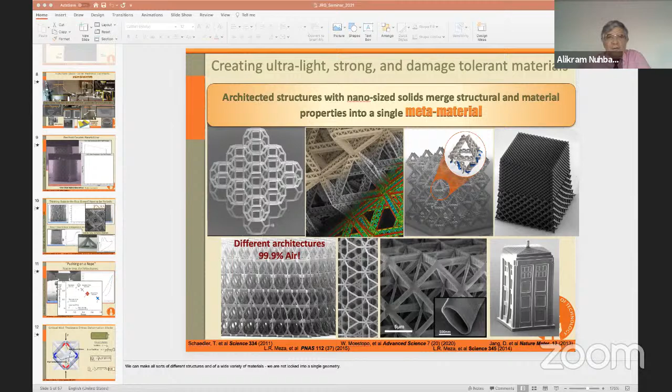Another question sent through YouTube chat: how large have you been able to make these nanostructures before they start to degrade and do not have the same strength compared to the nanoscale? Sorry, how long do they last?

Personally, I did not. It depends on the material, of course. It depends whether it's a ceramic or a metal or carbon. Some of them, like the carbon materials, are very, very stable. But polymer materials are really not. They start to degrade right away because of humidity and moisture absorption. So it's very much material specific, not so much nano specific.

The nano part actually comes in through the large surface area that's exposed. So if you're making a battery relevant material, you have to keep it in the glove box, because it would be susceptible to moisture as well. As you increase the surface area to volume ratio, this is where the stability or degradation comes into play. So it's a lot more a function of the material type and a lot less a function of the architecture, but probably from exposing a lot of surface area.

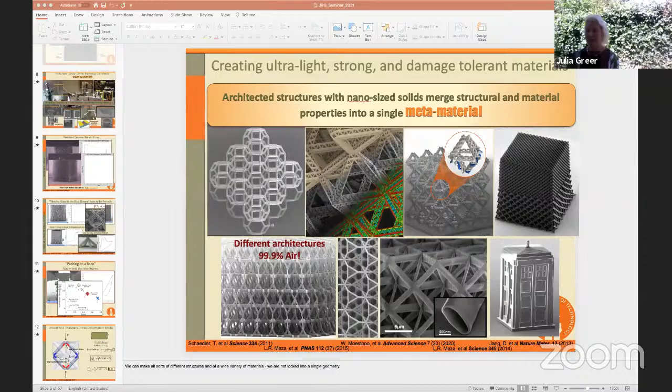I have to take my son to school now, he's getting pretty antsy at this point. So thank you very much for inviting me, and thank you for the kind introduction. I hope to visit you sometime in real life. Thank you very much, we appreciate it very much. Thank you, and have a wonderful evening.

I hope that you have a few things to ponder now. So you have a wonderful day. Thank you, all right, take care. Thanks a lot, thank you.